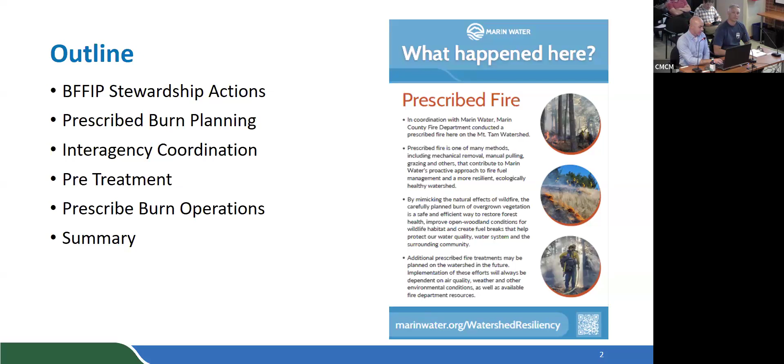So the outline for the presentation this evening: we'll talk about the stewardship actions under the BFFIP, the prescribed burn planning that went in to make this happen, interagency coordination, pre-treatment, prescribed burn operations, and a summary and where we're going. You all have heard about the BFFIP before, but we do have these drivers of change on the watershed that we're managing under.

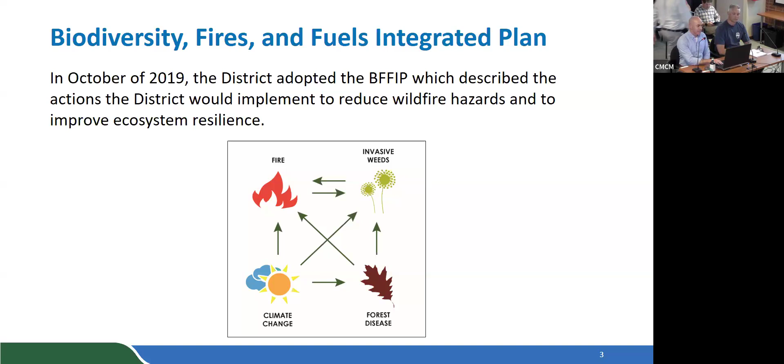The removal of fire as a natural process and the suppression activities have changed our landscape. We've had impacts from climate change. We've seen pests and pathogens, most notably sudden oak death, having an impact on some of our hardwood forests. And we've seen invasive plants really change the ecology of our landscape. So under our BFFIP, we have management actions to address these issues, and one of those is the implementation of prescribed fire.

The project we're going to talk about tonight is highlighted in this map. We call it Knob 2. This was part of a 240-acre plot that we've been working with the Burn Boss to develop over the last few years. Our natural resource staff really led an effort to identify potential projects like this and the resource objectives that we'd be moving forward with.

Some of those resource objectives relate to reducing fuel loads in the understory, partly a result of sudden oak death, or encroachment of coyote brush or Douglas fir into sensitive grassland habitat. Reducing the grass thatch layer in a strategic way and reducing the encroachment of trees into our sensitive meadows was a key objective of this effort. The initial treatment was carried out here in 2021, and it included folks going out and hand removing vegetation as well as masticating vegetation.

And then there's additional preparation work that was done the weeks leading up to our actual implementation of the prescribed fire. Now, we can't do any of this work without Bay Area Air Quality Management District permits. So we have a long-standing relationship with that agency and have been getting permits to implement our pile burning operations as well as these types of prescribed fires. And we do rely on them to make the call on day of, depending on weather conditions for the area that we're working in.

We also have environmental compliance work that goes on ahead of these projects. So in this case, we were doing bird surveys, looking for active nests and coming up with buffers around those, and then rare plants. The one rare plant population that we did have was outside of the project area in this case. In some cases, we can have prescribed fire really improve conditions for our rare plants on the landscape.

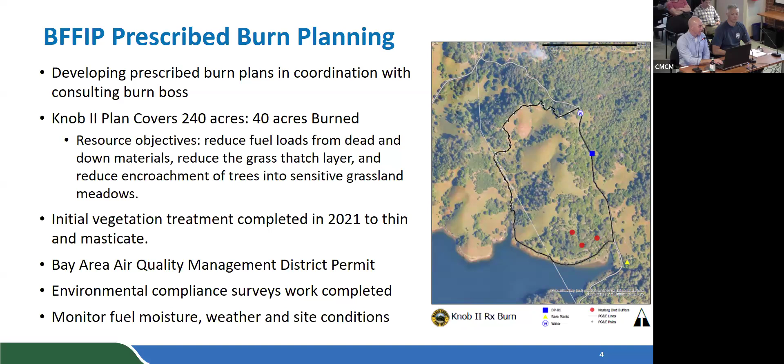So our comms department helps us with all the communication around these efforts. So we did a really robust initiative the last couple of years when we've been working to implement one of these projects. That includes signage out on the watershed, letting people know what's going on day of. We also developed some messaging that went out on our mutual agency platforms. And so, that happens from our website all the way down to our social media links. We create maps that we can hand out to visitors in the field so they can understand where the work areas are happening and what areas might be closed.

One really unique thing about this project, when we were implementing it this year, we were able to keep Sky Oaks Road open and visitors actually moving through the area as we were doing this work. And that was strategic in helping people see this activity becoming normalized on the watershed. We've been doing that with a lot of our pile burning operations for the last couple of years. And then post-project, we have a what happened here sign that we put out so that folks can better understand the ongoing work.

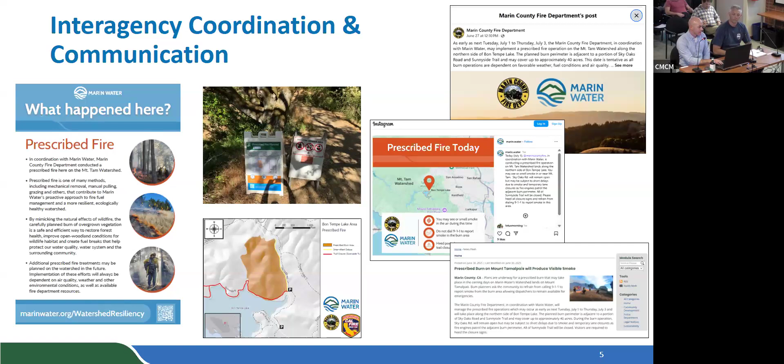So with that, pre-treatment leading up to it, a really critical component. The map on the right shows all the treatments that we've done under the BFFIP, and then the circle really highlights this Knob 2 area. We went through, day of, in partnership with our Fire Foundry crew, as well as Marin County Fire crews, going out and trying to develop our control lines and managing some of the hazardous trees that might be out there, piling brush in areas, creating buffers around some of those nesting locations, and just trying to make this a safe area for us to implement this work.

So in terms of implementation, I'm going to hand it to Kevin. He's going to really walk you through what the events on the day of looked like and how we carried out this project. Thank you, Sean. So yeah, with all that preparation, brings us to the actual burn day.

So all burn days start with a morning briefing, and actually I'd call it a pre-briefing, when all the overhead gets together on a little sidebar, and we went over the burn plan, make sure all the objectives have been met, and make sure all leadership roles are properly assigned. And then it comes to the general briefing where it gets everybody on the same page, and we all go over an IAP, an incident action plan. With that, it usually opens up with introductions and roll call.

And actually, with the roll call portion being mentioned, all the agencies that participate in this large force, like Sean said, from Marin County Fire, watershed staff, and Southern Marin brought up an engine and a couple personnel. Nicasio Fire brought an engine out with 3 personnel, and even Marin County Parks offered up a water tender to assist with water shuttle operations. So once roll call is done, it's an introduction, and everybody gets on the same page, going over the rest of the IAP.

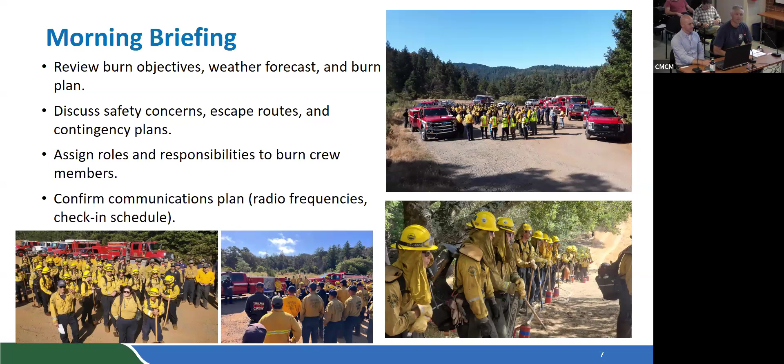So once that briefing is broken out, we go into our divisions, everybody gets their assignments, then they spread along the whole burn site. At that point, final checks are done on equipment. And most importantly, I would say communications are established once everybody's spread out, make sure everybody's on the same frequency, same page.

And then most importantly, in this situation, Throckmorton's Type 3 engine 1565 was our water supply engine. They were pumping over a 4,000-foot hose lay, which went over the ridge down to the shoreline and connected to the road. I know I mentioned Southern Marin's engine 607 was participating. They actually were the active patrol along the roadway.

And then as that test fire was conducted, everybody really liked the production of it. That test fire location was at the top of the ridge, but it wasn't just in the grasslands. You can kind of see a photo on the slide here. That's just below the test burn site. It didn't just consume grass, but also did an understory portion. So they got to see a full scope at the top there. That's why they chose that location.

But moving forward, everybody liked the test burn. So they went over comms to let everybody know that we're good to go and we like what we're seeing. At that time, TAM Crew 1 and TAM Crew 3 were the lighting crews. Crew 3 went along the west side, Crew 1 went to the east. And you'll see some of their tactics later in photos.

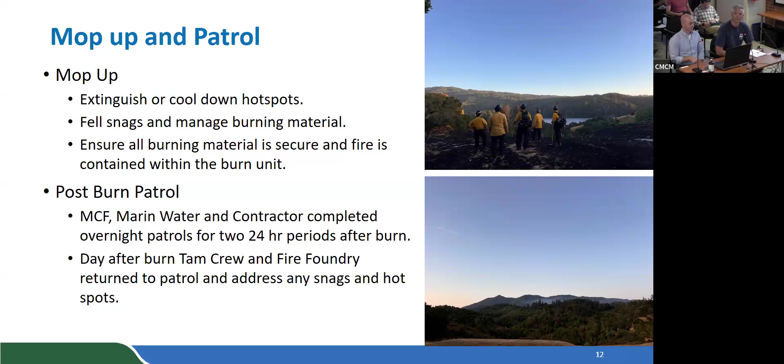In terms of the burning happening, we need to acknowledge that the board's approved contracts with forestry companies that have helped us implement this, as well as agreements with Marin County Fire to support this kind of activity on the watershed. Watershed staff are actively planning for future burns and doing the implementation preparation necessary, as well as the resource surveys to ensure we're in compliance with our BFFIP document. There's a tremendous amount of work that goes in before a burn even happens.

To summarize where we're going from here, we have other burn plans already developed for the watershed, and we're looking forward to implementing those through our partnerships. We're using some of our wildfire pathway modeling, presented a few meetings ago, to help refine our BFFIP treatments and identify long-term areas where prescribed burning can be used as a maintenance tool to maintain the benefits of our initial treatments and reduce those risks. Really, where we're growing and building is in continuous cross-jurisdictional planning and implementation.

Recently, the One TAM partners submitted a grant application to the Natural Resource Division of the state, which has CAL FIRE, Forest Health, and Wildlife Conservation Board under it, on the order of about $28 million, to look at regional projects here in Marin County to implement more forestry work as well as prescribed fire. That came with funding to support our partners at Fire Foundry and Marin County Fire as well. There's a lot of work going on in the background to help lift up our capacity here locally to do more of this work.

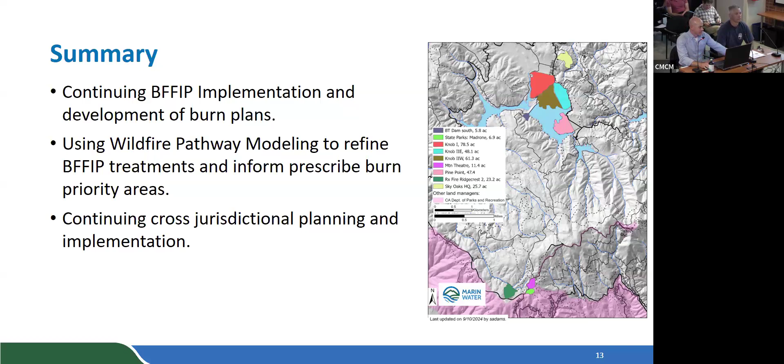Director Smith: Yeah, all good. Thank you so much for the report. At some point, it'd be great to look at the history of burns and impact and trends, but obviously we're moving in the right direction. I'm super appreciative and supportive.

Director Russell: Nice job.

Director Mayer: Yeah, just thank you. Great news. And I guess wildfire is to California what floods are in Texas. So it's really nice to see that we're doing what we can to ameliorate what the impact might be of a wildfire. Thank you very much.

No, thank you very much. I'll keep it short tonight since I've shown appreciation in past meetings, but continuing to remind us about the amount of effort that goes into pulling off what you did for one day is Herculean at this point, given how far behind the curve we are, as well as how far behind we are in putting fire on the ground again. Thank you for the reminder of that. And thank you to Marin County, specifically Chief Jason Weber, for his partnership and willingness to help us out, because it's so key to bring everybody in. Hopefully his folks are able to get something out of the day as well.

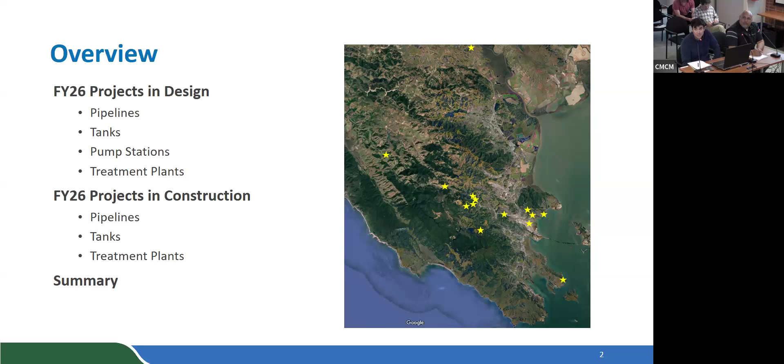I'll be going through all the projects that are currently in design or about to kick off design with the new FY26 project budgets, as well as projects that are already in construction and actively going on this summer. The image here to the right is satellite imagery of Marin County, and the little stars show where all the projects are located that I'll be talking about tonight. As you can see, they're located all around the county. The one furthest up to the north is Kastania Pump Station in Sonoma County. The one all the way to the south is Paradise Drive Pipeline Replacement Project, and all the other ones are various pump station and tank projects. So with that, I'll get into it.

I'll start with the projects that are currently in design. This is an overview of our pipeline projects that will be going into design this fiscal year. As you can see, there's almost 40,000 feet of design work that has to be done with a fiscal year budget of $12 million. These projects are put in chronological order in terms of when we're expecting design to be completed throughout the next fiscal year.

The first one at the top, the Canal Pipeline Replacement Project, we actually advertised today, so the design is complete. Anticipated construction is to occur sometime in September of this year. As you go through the list, you can see that we've got it spread throughout the year, loading it appropriately for our staff level and for our contractors.

The largest project up on the board there is the Paradise Drive Pipeline Replacement Project, which is a fire flow program project we take care of through our fire flow program. There's a couple projects at the bottom that are starred: the Miracle Mile Pipeline Replacement Project and the Ross Common. Both were earmarked for construction in FY27, but we have programmatic budget to start design this year so we can be ahead of the curve. Both projects were brought to our attention by operations, who pointed out these more problematic areas, and now that we have room in the budget, we'll start design and be ahead of the curve.

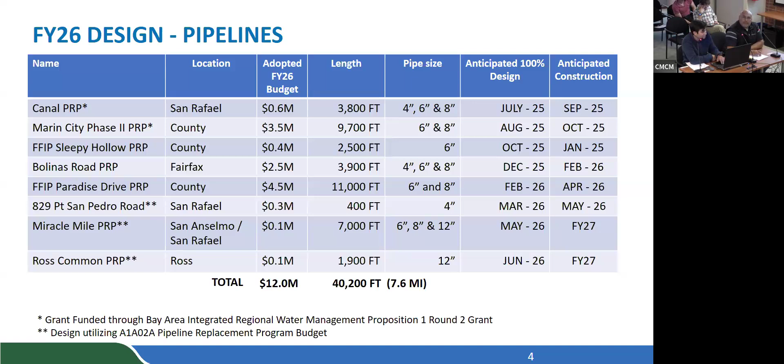I'll focus on two projects actively in design right now. The first is Paradise Drive, replacing roughly 11,000 linear feet of 1920s era cast iron pipe, over 100 years old, leak prone and undersized and fire flow deficient. That project is expected to be ready to go sometime after the new calendar year. This is interesting not only for its size but because it's actually a phase 2 project — phase 1 was completed 5 or 6 years ago on the northern part of Paradise Drive. When this project is completed, we would have replaced all the fire flow deficient pipe along the backside of the Tiburon Peninsula.

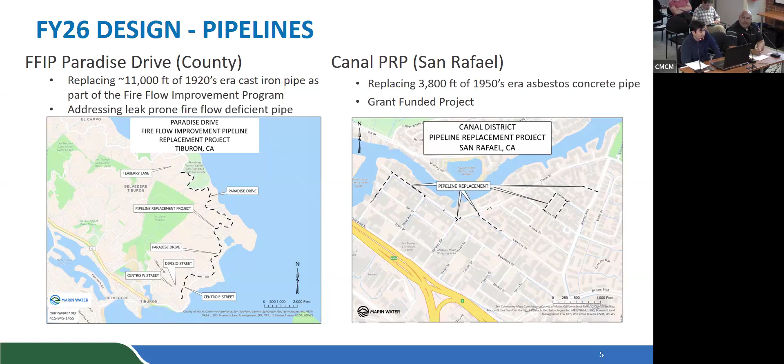The other project I'm highlighting is the Canal District Pipeline Replacement Project, replacing 1950s era asbestos concrete pipe. This is a grant-funded project, so we're sharing the cost with the state, which is worth highlighting. It's also one of our more problematic areas in San Rafael because there's polybutylene plastic services in this area, so it's extremely leak-prone, and our crews have been out there over the decades constantly repairing this pipeline. This project will address a lot of the leak issues we have in the canal area.

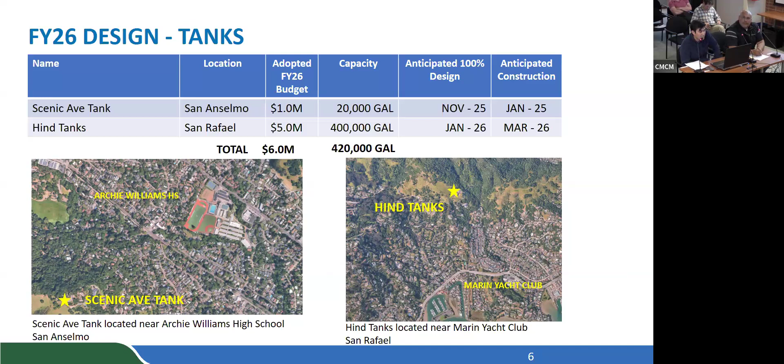Moving on to tanks, we've got two tank projects currently in design. The first is the Scenic Ave tank, a 20,000 gallon redwood tank located in the hills above Archie Williams High School in San Anselmo. The other is the Hind tanks, located in the hills above the Marin Yacht Club in San Rafael along San Pedro Road. Both projects are expected to have design completed over the next 6 months, and both will be going into construction this fiscal year.

This project will likely go into 2 phases, similar to Pine Mountain tanks. Phase 1 will be creating a whole new tank site with retaining walls and access roads. Phase 2 would actually be building the new tanks, all while the existing tanks remain in service. Once the new tanks are completed, we'll transfer our service over to the new tanks and then demolish the existing redwood tanks.

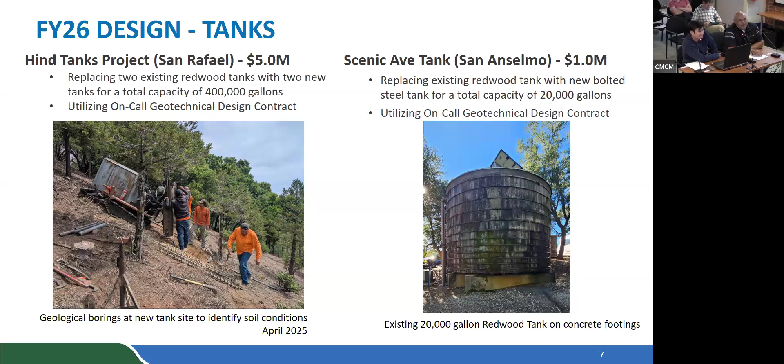All right, switching gears to pump stations. We've got 3 pump station projects in design right now. The first one, Fairfax Manor, is actually technically complete, but we haven't gone to advertisement yet. We're waiting on construction easements, but that's the one that's in the hills above Fairfax, kind of adjacent to Fairfax Lumber. The second one is Kastania Pump Station Rehabilitation Project, which I've spoken on in the past year. That's a transmission pump station that delivers water from the north from Sonoma County Water Agency.

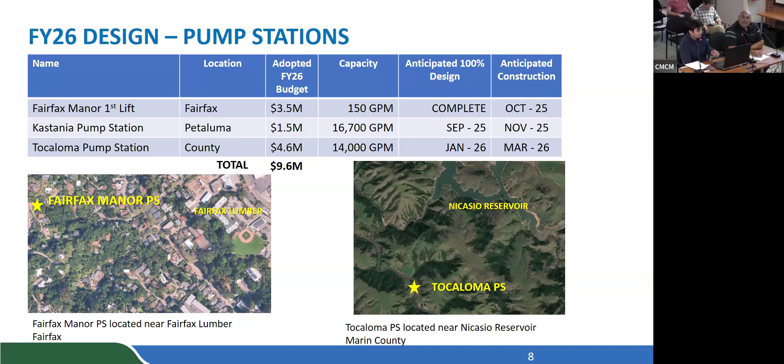So again, just highlighting 2 of these 3 projects. The Fairfax Manor Pump Station is a typical distribution pump station that you'll find throughout the district. In terms of capacity, it's much smaller than Tocaloma or Kastania because they're not transmission pump stations. They're distribution, and they're meant for small communities here throughout the district.

The large cost of this has to do with the topography that it's located on. It's on a hillside. It's going to require multiple retaining walls, a lot of civil work, and of course, we'll be installing a fire hardened structure. And I'd like to point out that with all these projects, from pipelines to tanks, we'll be increasing not only its reliability but its resiliency.

So for these pump stations, for instance, there'll be seismically resistant structures, and we'll be installing more efficient pumps. So we're reducing PG&E costs, as well as variable frequency drives, which will allow us to really control how much flow and operational efficiency we have.

Is it going to be crush proof too? I don't know. This one might be. It's going to be as crush proof as possible.

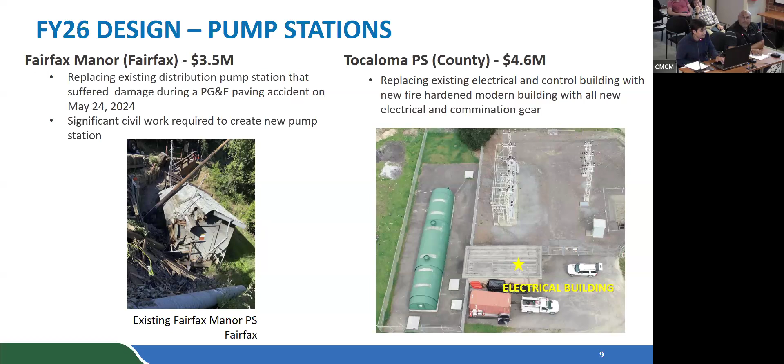Okay, moving on to our treatment plant projects currently in design. We're replacing existing valves that are part of the treatment plant process. So both at San Geronimo treatment plant and Bon Tempe treatment plant, we're replacing valves that are critical to the treatment process. These valves are at the end of their useful life and leaking. And since we're buying 6 at San Geronimo and 4 at Bon Tempe, you can't just go buy one off the shelf. You have to go out and solicit specialty valve manufacturers and get all the right equipment.

And so actually earlier tonight on the consent calendar, we approved the purchase of the 6 valves at San Geronimo treatment plant. And these valves, again, they're not off the shelf. They take up to 6 months to deliver. And so you have to be very strategic when these projects go out. So we already have the 4 valves at Bon Tempe. So this project will go this winter.

So we'll actually have to take Bon Tempe treatment plant offline, which is a great time to do it because demand is low. We'll replace the valves, and then we'll likely get the San Geronimo valves sometime in January. And we'll likely wait until the next low demand season to install them, because we don't want to be caught in the spring still trying to replace these as demand goes up. And so it's a good idea for us to offset these by fiscal year or by winters. What's wrong with the old ones? They're original and they're leaking, and so that's not ideal in the treatment plant process.

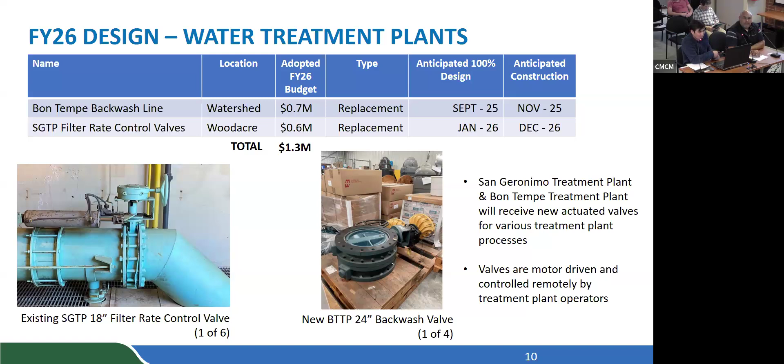This last slide that's in design, these are just some of the other various projects that come up that are not part of the distribution system, if you will. So we're doing a landslide repair in Sausalito that's causing some site water runoff issues going down the hillside. We're looking into installing electrical vehicle charging stations at all of our sites. So here at the admin building, across the street in the operations yard, and then as well as up at Sky Oaks. So we're in the early steps of this one right now.

So we're looking to see actually how much capacity we have, and these are for our fleet vehicles, and we're looking to see how many fleet vehicles we could actually charge at one time to keep up with the state standards and requirements. High speed or regular? Level 2. Level 3 is not practical for the amount of vehicles we would have to charge. But level 2, we've been told just based off of high level from our electrical consultant that that's most likely what we would do.

And that's what most municipalities or school districts or counties around the Bay Area are doing, are level 2. We might put in one level 3 for, say, an operational vehicle across the street. However, they really pull a lot of amperage, so much so that we might be stuck arguing with PG&E for a while to figure out how we're going to get that here. So level 2 right now is the plan.

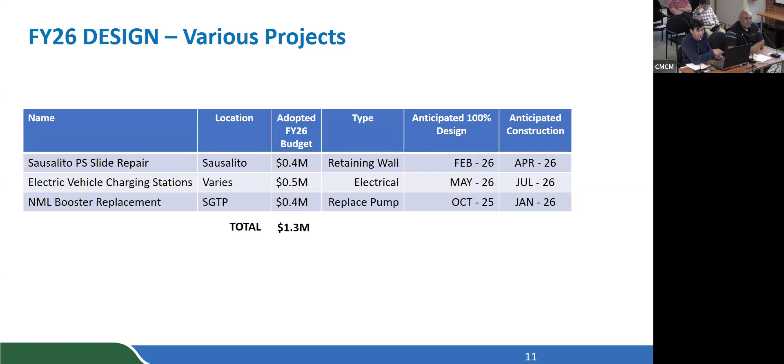All right, now shifting gears to projects that are actively in construction this summer. So these are the 3 projects that went out to advertise and award this last spring, and these are all projects that are currently going on throughout the district. So you have the Park Road Pipeline Replacement Project in Fairfax, Bridgeway Pipeline Replacement Project in Sausalito, and the largest of the 3 is the Glenwood Pipeline Replacement Project. And again, that's a fire flow program project. All these are increasing the system's reliability and resiliency to seismic events and reducing the probability of leaks.

Something that I want to point out on all of our pipeline projects, we're not just replacing the main line. When we set our limits, we're replacing every aspect of our infrastructure that's in the ground. So it's the main line, it's the valves, it's all the fittings, it's all the hydrant runs and the laterals to everyone's homes. So there's a lot of work that goes into installing all this.

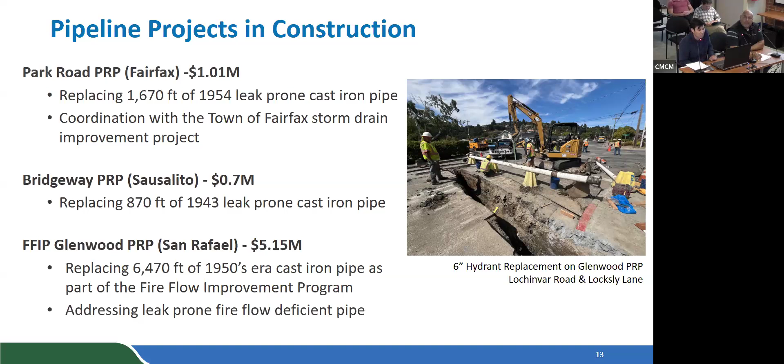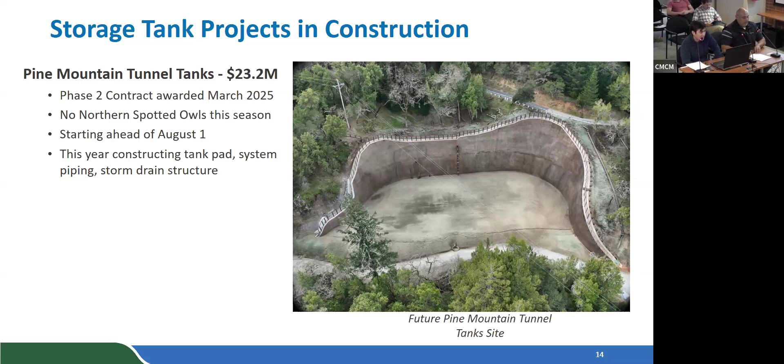We have got one storage tank project in construction this construction season, and it's a big one. It's the Pine Mountain Tunnel tanks, valued at over $23 million. I know it's been brought to the board many times, but it is something to showcase because it's a multi-year project, and so every year we're going to be making progress on it. We actually got the start early this year because there were no northern spotted owls in the area. So Azul, our contractor, is already out there, and they've begun the work on constructing the new tank pad, system piping, and all the storm drain.

And then the last one is our treatment plant project in construction. Again, this is a fire hardening project and also increasing reliability. We're replacing a 21-year-old leaking roof with a new Class A fire rated roof on top of San Geronimo treatment plant. Project was awarded in April, and we'll have the ability to add solar panels in the future if we decide to go down that path. And the project is expected to be completed later this summer prior to the rainy season.

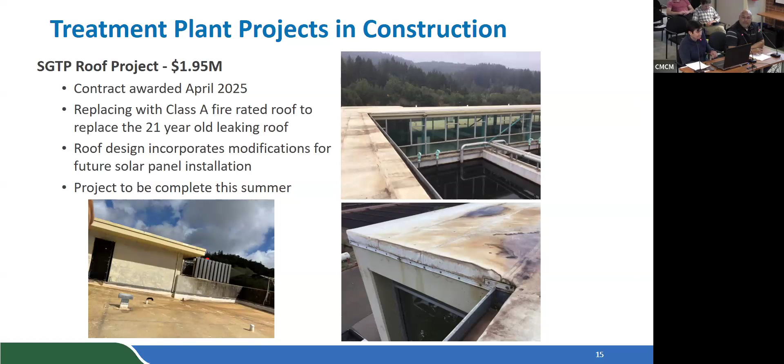Okay, in summary, those are all the capital projects, both in design and in construction this year. So at the end of fiscal year 26, we'll be working on all the core aspects as I discussed earlier. So 9.2 miles of pipeline. We're doing 3 storage tank projects, 3 pump station projects, 3 treatment plant projects. And all of them are going to be focusing on reliability, resiliency, and operational efficiency. All the project milestones that I went over are going to be delivered through a strategic mix of both in-house design and consultants.

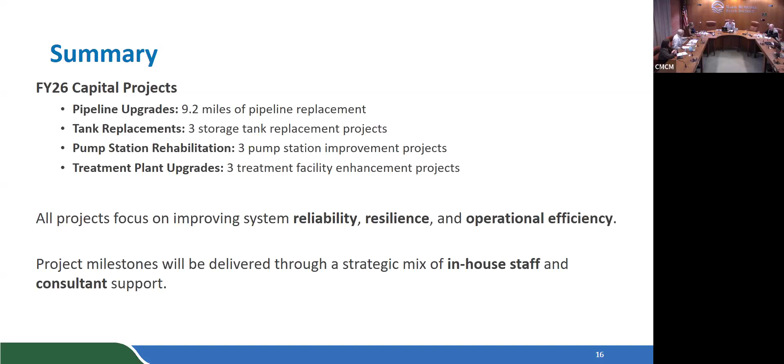Thank you. Thank you very much, Alex, for the presentation. Appreciate it. Really good update. I'd like to go ahead and solicit board member comments. No comments. Thank you for the update.

Director Russell. Well, it's a little exciting about Paradise. And now you're getting closer to home. The other one was kind of down the road from us, but this one looks like it's right in front.

Yeah, that pipeline is getting a little aged for sure. So it'll be good to get rid of that one. But tough traffic like always on Paradise.

Okay, thanks. Director Smith. Yeah, thanks for the report. I think it's important to note that this is maybe the unsung, but some of the most important work that we've done over the last couple of years, and a direct result of adjusting our fees and our rates in order to help maintain this district. And I've yet to hear a comment from a board member, anyone who said that these projects were frivolous in any way, but the opposite, quite necessary and important.

So thank you, team, for stepping up and doing this, and the county will appreciate it. May not articulate that, but they will. So well done. Thank you. Yeah, and Zach and Alex, thank you very much just for the reminder of how much work it takes every day just to keep the water running outside of the other things we do. So it's good to see.

And also to somewhat piggyback on Director Smith's comments, it's really good to see us spending the public's money or ratepayers' money responsibly. We asked them for additional rates for a reason. We identified issues, and now we're starting to tackle them. So it's really good to see.